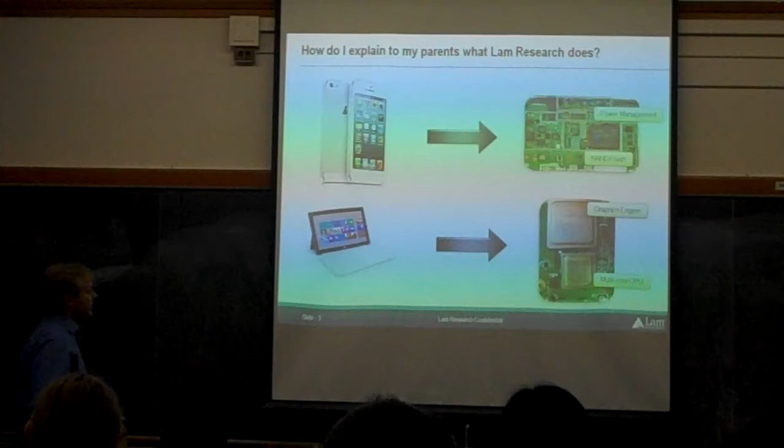So, how do I explain to my parents what Lam Research does? Besides, we don't do testing on animals. So you take any piece of electronics, it doesn't matter what it is - it could be a laptop, tablet, iPhone 5, this Surface coming out this week - and you open it up, which you shouldn't do unless you want to really screw things up, and you'll see a printed circuit board. Pretty obvious, everybody's seen these. And on the printed circuit board are a bunch of integrated circuits, a bunch of computer chips.

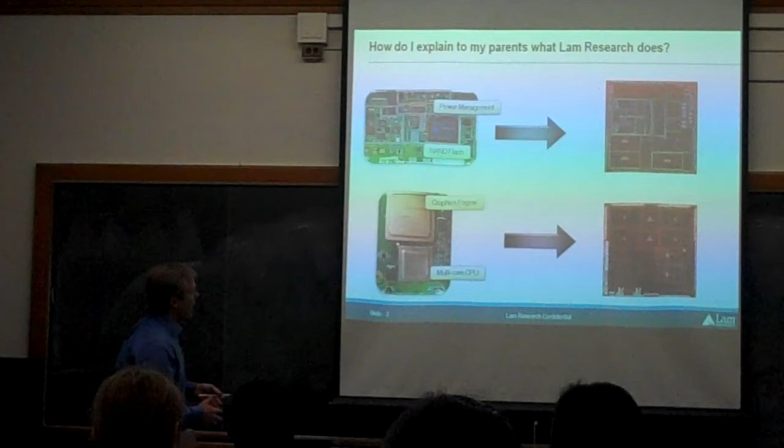Take one of those computer chips, and I open it up, and what do I see? I see a pretty complicated integrated circuit. It's got graphics processor units. This is an ARM processor, probably the A5 from Apple. There'll be NAND flash, there'll be memory. Any chip will look like that. Get a scanning electron microscope, go down a little further, and what you'll see at the heart is some very small structures - transistors, interconnect wiring. So that's really what's making these devices tick.

But how do you make these? Well, that's what Lam Research does. We make the equipment that processes the wafers, that makes the chips that go into every single piece of electronic equipment. And in fact, I can safely say that if you buy any piece of electronics today, maybe a car, anything that has a chip in it, that chip will have gone through a piece of Lam equipment. There is no chip made today on any sort of leading edge application - every USB stick - because we are in every chip maker in the world. And so I like to think of it kind of as the engine that helps keep the nanotechnology moving.

So we make equipment that's used for some of the processes - every chip, but not every single process. And we'll talk about the steps that it takes to make a computer chip.

Before we do that, let me tell you a little bit about the culture at Lam. We have a mission statement, a vision statement, and core values. A lot of companies have these, and they're just hung up in the cafeteria or something, but we spend a lot of time thinking about this, and we try to write the words and actually make sure we stick to them.

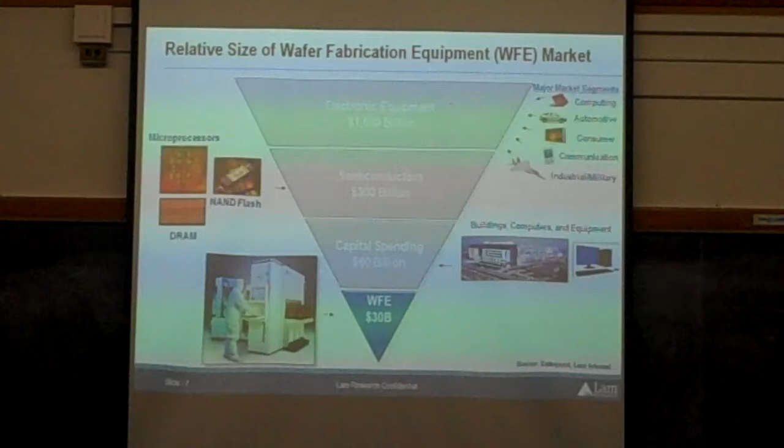So again, we take it for granted nowadays. You got a solid state video camera at the back of the room, everybody's probably got a flash drive on their keychain, your car takes a ton of chips now, semiconductor content, let alone military communication. It's everywhere. It's more than just iPhones.

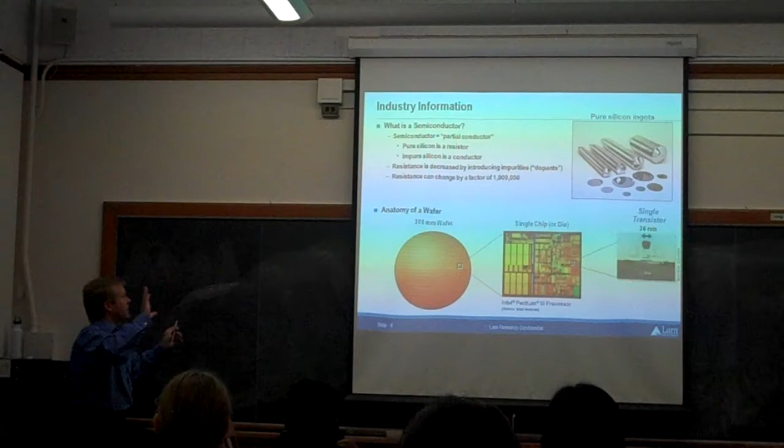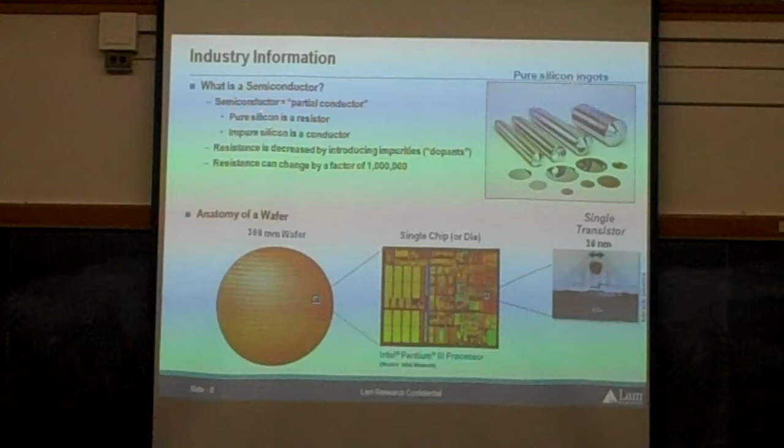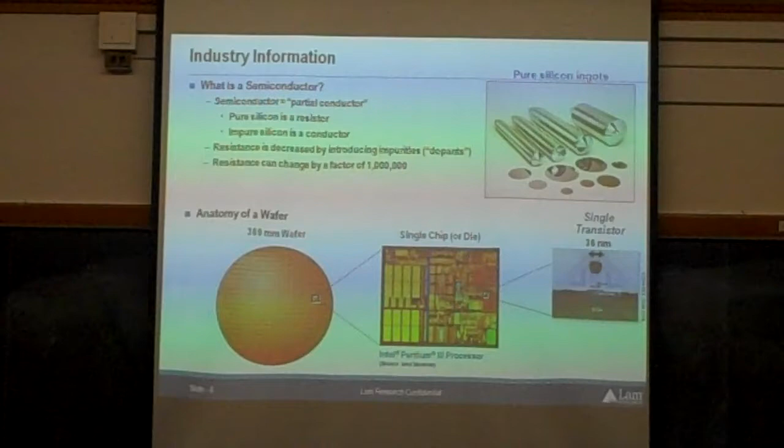So it's a semiconductor, and because maybe most of you haven't taken a wafer processing class, let's get a baseline. A semiconductor is kind of a partial conductor - it conducts some of the time, once in a while. You can dope it in a way to make it a conductor, or there's a form where it's a resistor. So if you think about it, if I have a conductor and an insulator, essentially it's a wire, right?

I got copper in the middle, and I put some plastic insulation around it, I got a wire. And with that wire, I can do all kinds of stuff - I can turn switches on and off, I can move signals around, I can store bits of information. And that's really all that happens, but on a very, very small level.

So if you look at what is processed in these pieces of equipment I'm going to talk about, they're wafers - pure silicon, single crystal silicon wafers that are pulled out at the correct diameter. Right now everything's 300 millimeters in diameter, so 12 inches across essentially. When they make the wafers, they have molten silicon, and they basically pull them out in these long tubes of solid single crystal silicon.

It's a very slow process - you put a starter crystal in, and then all the silicon, as it gets pulled out and cools, will arrange itself in a lowest energy state, and that turns out to be single crystal. Then they take these things and slice them into little discs, polish them, and that's your starting material to build up an integrated circuit.

So you take that blank wafer and start running it through these pieces of equipment. You deposit layers, you put masks down to remove selectively different portions of the layer. I got some conductors, some dielectrics, some resistors or insulators, and eventually I end up with a pattern with multiple layers on it. I'll show you some cross sections of those.

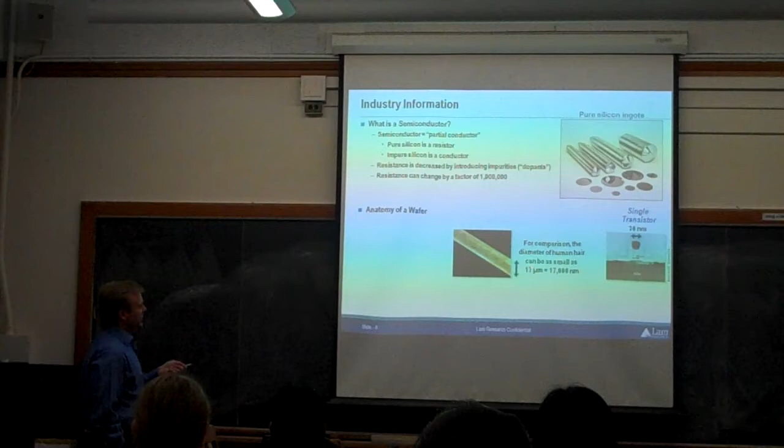Okay, so you have to think about how big a human hair is and all these things. We're working at 36 nanometers - it's continually just shrinking. I'll show you Moore's Law, if you've heard of that - these things get smaller and smaller every generation. A human hair is 17 microns, so that's 17,000 nanometers. You can see we're a lot smaller. At some point we need something else to compare it to.

But so, customers - we talked a little bit about it. It's worldwide. Pretty much anywhere they're doing high tech there's a wafer fab, and if there's a wafer fab, there's Lam equipment there. The big three are Samsung, Intel, and TSMC. That's kind of by sales, by the amount of equipment they buy, but the real measure in my mind, since I'm worried about research and development, is these are the customers driving the technology roadmap. They're constantly saying, look, I need to shrink, I need to do this faster, I need to do it smaller.

IBM clearly has a great R&D group and they help, but they're just not as big a player anymore. So you can see it is truly a global business. Please stop me if you get questions, it's fine.

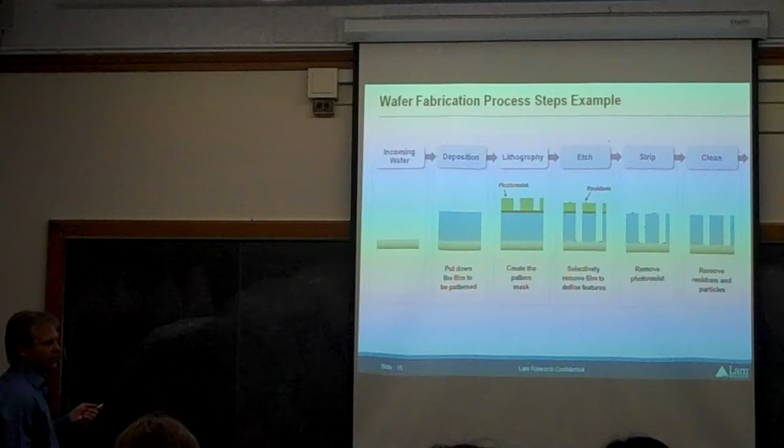So if I take these steps and look at it in a very simple cartoon, I've got a wafer coming in - this is that circular piece of silicon. And I have to put down some sort of layer to be patterned later. This could be silicon dioxide, this could be silicon nitride, it could be copper, it could be any number of films that you need to build up an integrated circuit.

But in order to pattern it, I want to end up with something that looks like this, where I've got maybe some lines, those transistor-like structures. So again, I'm looking at the cross-section here. How do I do that?

Well, I have to use actually a photographic process, although it's on a very, very small wavelength scale, where you spin on this green layer - it's just a polymer essentially, but it's an optically sensitive polymer. And then I have a mask of what I want the pattern to look like on the wafer. I shine a light through of the right wavelength - in this case it's a UV exposure, a UV light source. It's blocked where the mask is opaque, and it transmits through.

And where it transmits through, it'll cross-link. So I end up with a region where, when this polymer layer is on there, this part is hard, this is soft, hard, soft.

And basically then I can chemically remove, I can wash away the soft parts, and I end up with this layer that's the pattern I want, but it's in polymer. That's a material that's not going to last on a silicon wafer. So we use that in an etch process to transfer that pattern down into the underlayer, whether it's silicon dioxide, silicon nitride, or a metal. And then that's the etch part.

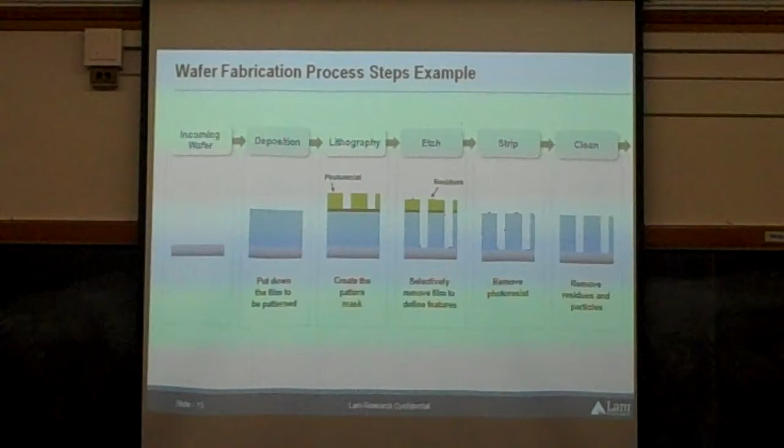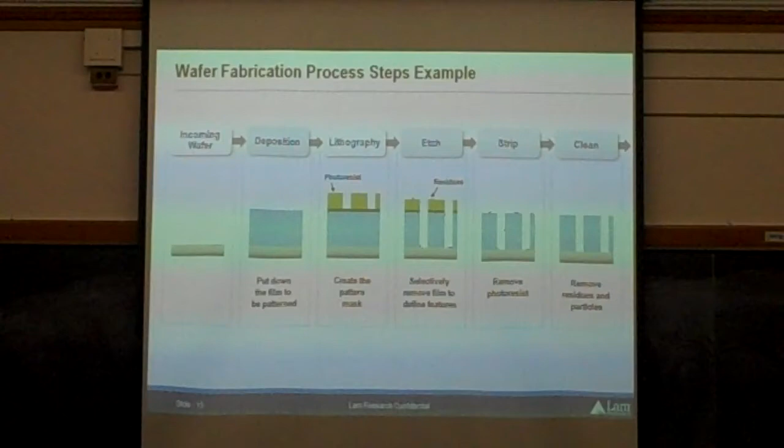And then I need to remove that mask, and that's the strip, where we do photoresist removal. I'm removing this photosensitive material—it's called a resist, photoresist, because it's photosensitive, and it's nominally supposed to resist the etching process. It's got to stick around long enough so we can finish clearing out the places where we don't want the material. And then, as nicely indicated by our little red dots, there's going to be some residues, because remember, this material's getting removed, and some of it may stick around, so you need to do it clean. You can imagine on these small scales, if I have any sort of impurity on there, it can easily trash the transistor. Okay, so here are the Lam processes.

So I'll walk through each one of them, and we'll kind of look at it in a cartoon way, what are different ways to do it.

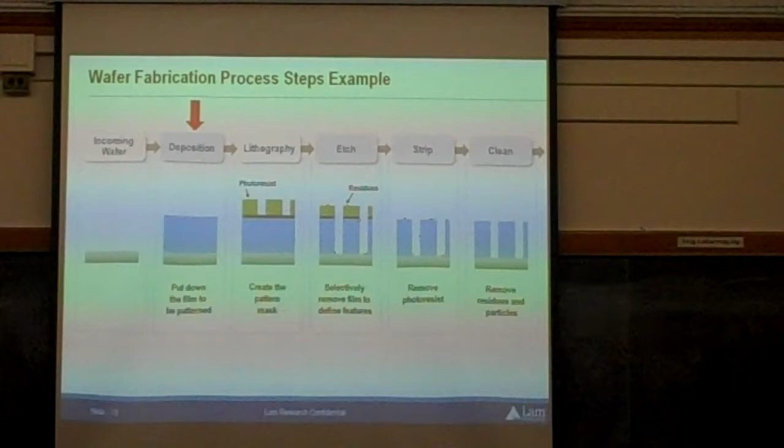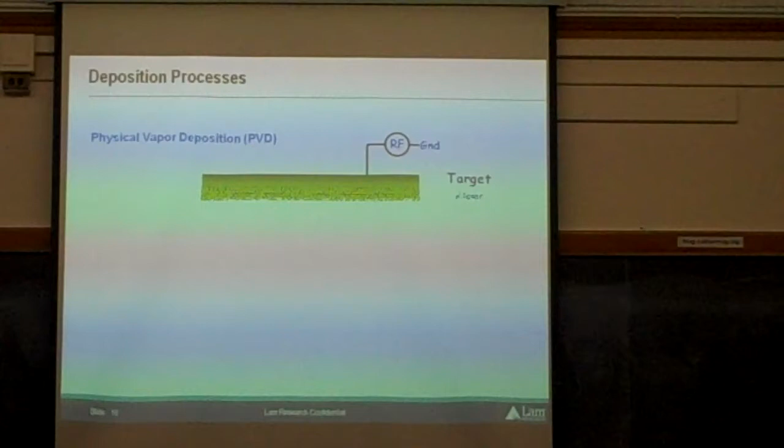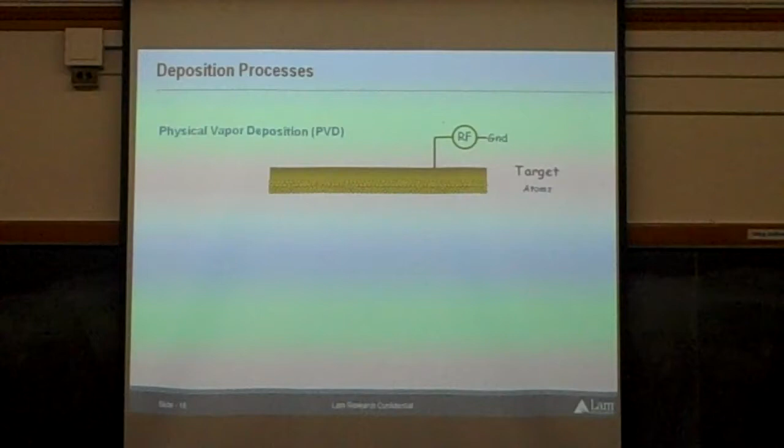So I'm going to show you three different types of deposition, and there's kind of a hybrid in the middle of one of these. One is physical vapor deposition. So I bring in, I've got a vacuum chamber, and I bring in what we call a target, and it's just a piece of the metal that I want to transfer to the wafer. It could be made of copper, could be made of tantalum, could be an alloy like tantalum and carbon. And then I put the wafer down here.

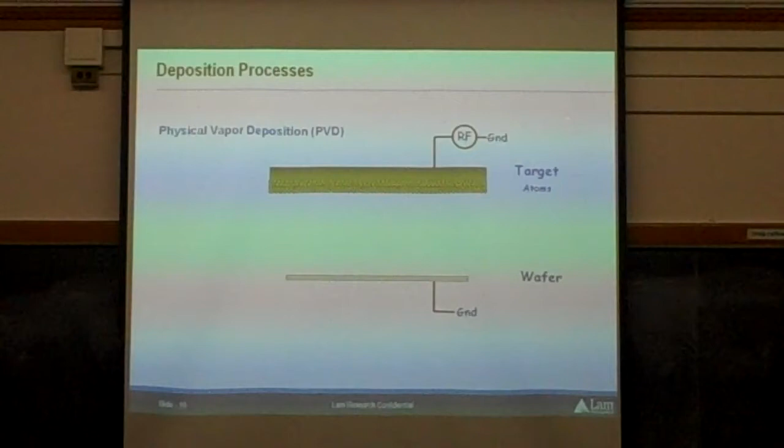So remember, I'm in a vacuum chamber, and I put a plasma—you see plasma is here all over the place, so we'll actually hire a lot of plasma physicists as well. If I flow argon in here and turn on radio frequency power, I basically can get this induced field coming from this metallic plate to rip off electrons off of neutral argon. So I've got just argon gas floating around there, and electrons are easy to come off if you have enough power. So now I've got an ionized gas—I've got electron soup and Ar plus ions sitting in there.

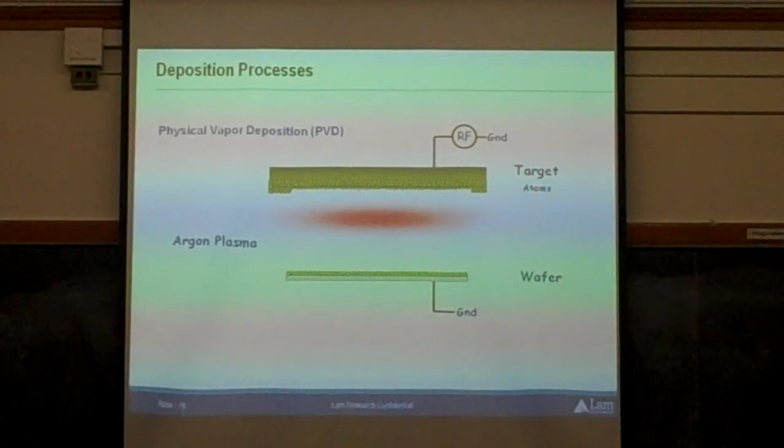And I can now use that to accelerate those argon ions, which are relatively heavy. They're in the gas, and I can accelerate them so they bombard this target. They sputter off an atom, and it's going to go line of sight because it's low pressure down to the wafer. So I'm basically transferring a layer of metal from this target onto the wafer, and it should look like this. Okay, so that's our physical vapor deposition—it's just a physical process, right? I'm just sputtering, bombarding this target with little projectiles of ionized argon. And okay, here's copper, titanium, tantalum.

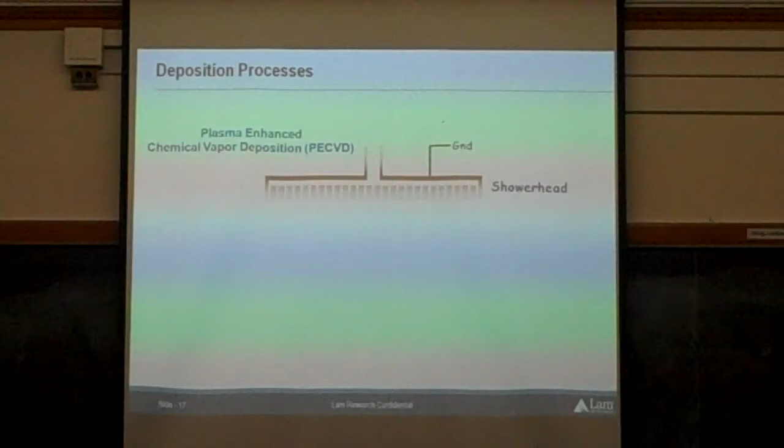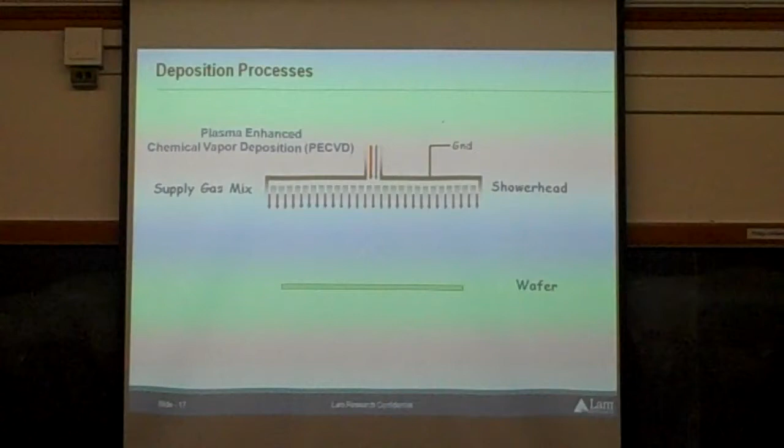So now there's a variation on that where instead of physically doing something, I'm going to take that same vacuum chamber, and this time I'll put in a shower head. Again, it's made out of metal, but this is not going to be participating, hopefully, in the reaction that's going on. Put the wafer down below, and I need to flow reactive gas. So this is chemical vapor deposition. I want to put the gas uniformly across the top of the wafer. So now I've got these two red and blue gases coming into the wafer, and I need to give it some sort of energy.

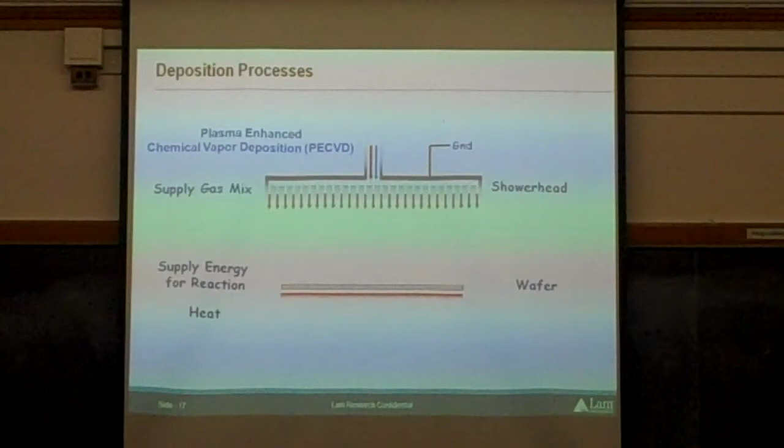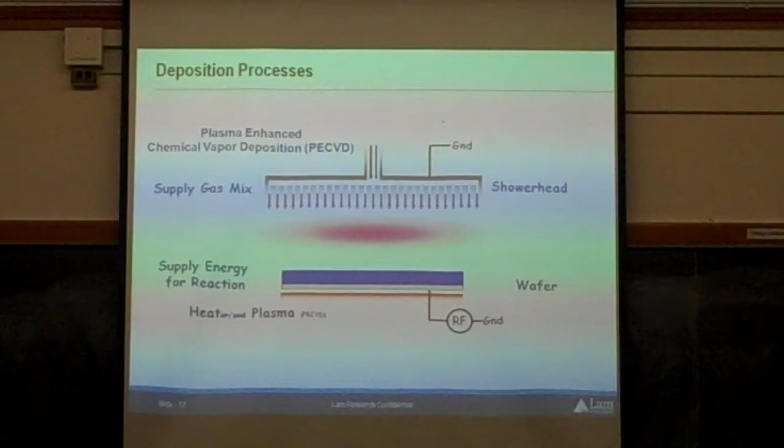If I do just chemical vapor deposition, these gases will condense on the wafer. I give it heat and it reacts—you kind of got blue plus red equals, what do we have? Purple, right here. And there's two different ways to do it. One is I can have the gases condense, turn on some heat, and have it react—pretty straightforward, just a chemical reaction. An example of that is if I take silane and ammonia, I can make silicon nitride, which is a good insulator with unique properties that you want in the semiconductor device. I can also put some RF power on, same thing that we did in PVD.

Remember, the RF power was up here. RF just means radio frequency, so it's oscillating up and down. This causes an oscillating wave, which will rip electrons off of the supply gas. Those gases can then react in the gas phase and deposit on the wafer. That's plasma, the PE part, plasma enhanced.

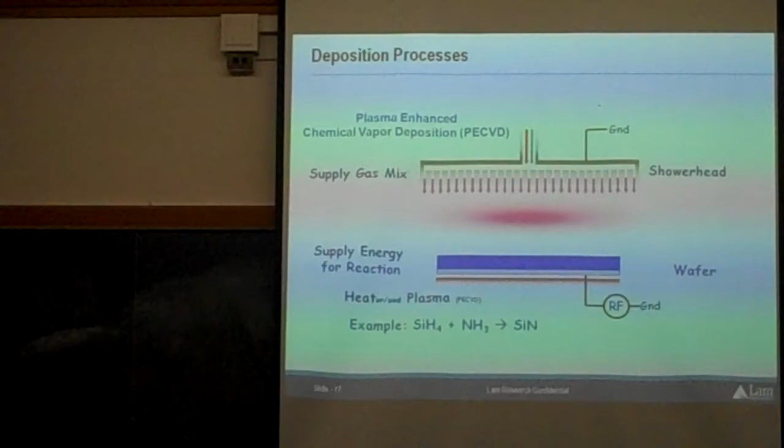So I can have just a chemical reaction that's thermally driven, or I can add in a plasma component and make it much more reactive. If a blue and a red ion come down, they're going to very quickly react, wanting to recombine if they've been ionized. So that's a good way to put down insulators.

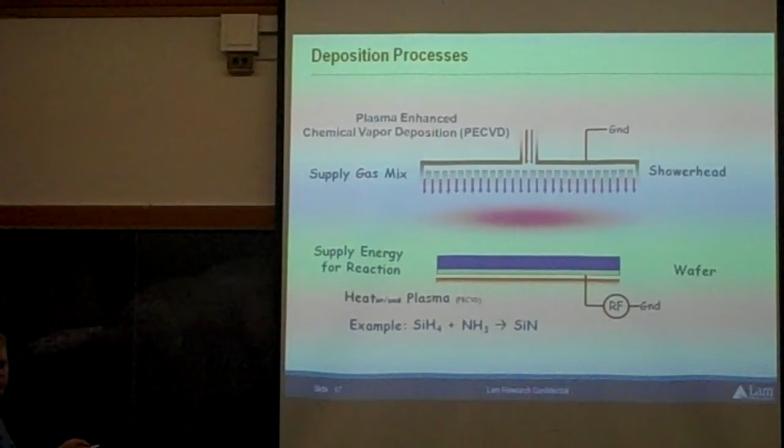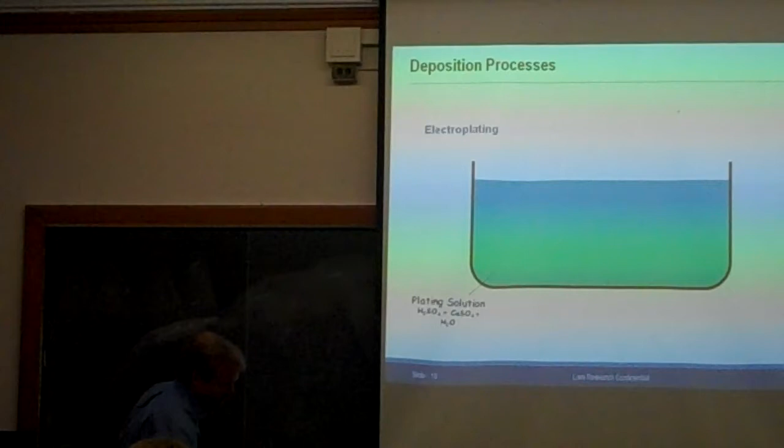Okay, electroplating, classic chemistry problem. The Nernst equation is somewhere in here. So I take a bath of sulfuric acid and copper sulfate, and put in my source of copper.

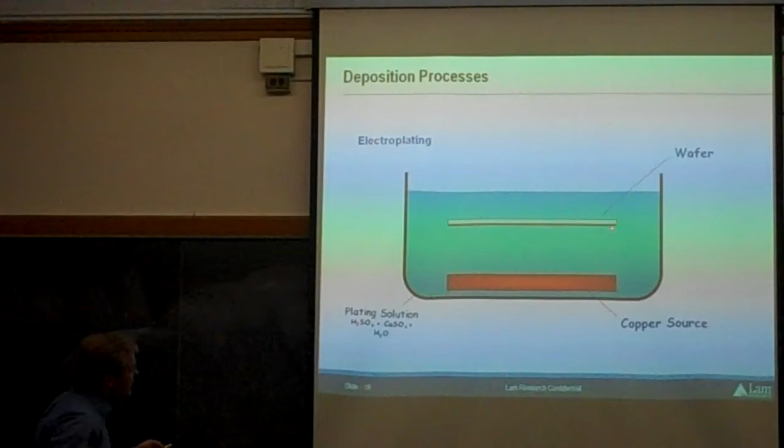So it's analogous to the PVD process, except now it's immersed in this bath. I put the wafer on upside down in this diagram, so it's all in the bath. You'll notice there's actually a copper seed layer on here. This reaction won't work unless this is a conductive surface.

So we use that PVD process I showed you before to put down that first layer of copper, then put it in this electroplating bath, hook up your Duracell battery, and you get a standard electrochemical reaction right here.

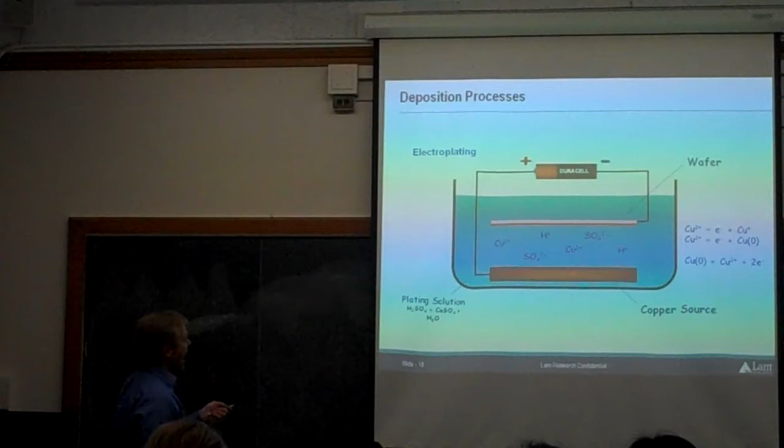What happens is the copper will then migrate from the anode to the cathode, and I plate the copper. But it can be in very small features, so I can have spaces on those transistors and coat it with copper if I wanted to. It's a very precise way to grow a lot more copper than just a single layer.

I want to jump back here. I want to give you one other variation on this because you may run into it. I talked about chemical vapor deposition: I'm flowing red and blue, no plasma, they're both sitting on the surface, I heat it, it reacts. There's a method - Finland was the first place they did this, about 20 years ago - called atomic layer deposition.

That takes advantage of special precursors. You have a special red, and you flow that only by itself for one step. It's chosen so that it'll make an atomic layer, it's self-limiting. It will only coat on the wafer, it won't coat on itself, so you only get one atomic layer across the surface. Then I flow blue, and that'll only form one atomic layer on the surface of red.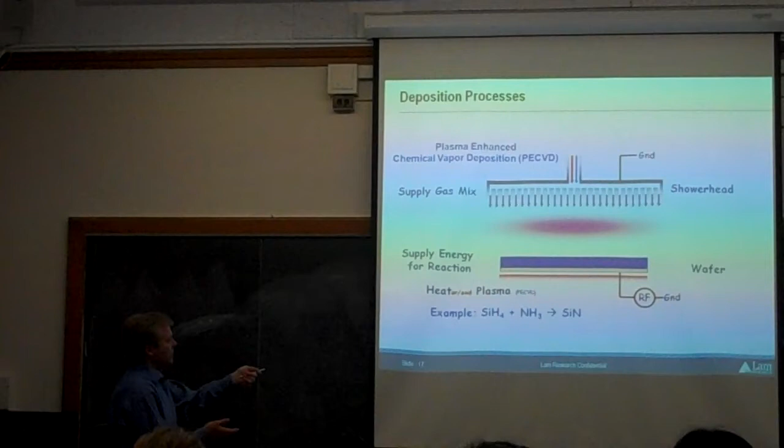Then I do a reaction step, heat or whatever to trigger it, and it forms, in this case, purple - one layer. So you're literally doing one atomic layer at a time, which you can imagine is very precise. I want to grow an atomic layer - what's a bond length? The carbon-carbon bond length is about 1.5 angstroms. So I can make stuff on the order of tenths of nanometers and build it up.

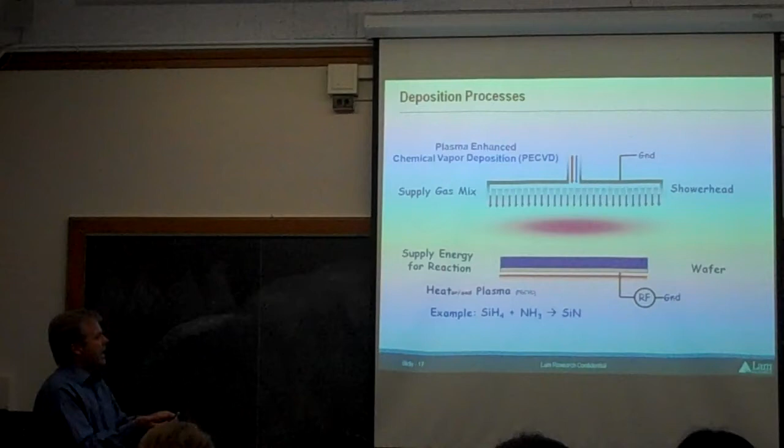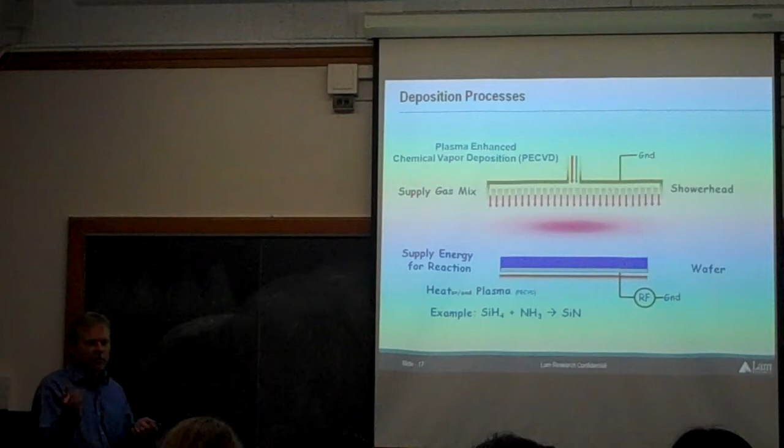Great for precision, terrible for throughput and efficiency - it's going to take a long time. So the transistor in every one of the Intel chips today has an oxide layer that's the gate, the thing that helps turn the transistor on and off. It has to be super thin.

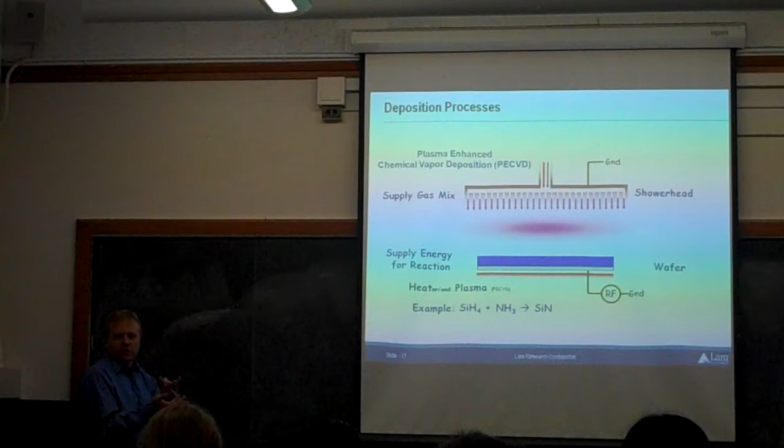And so it used to be silicon dioxide, but the silicon dioxide can't take it anymore - I have to keep making it thinner, and now it's so thin that it's leaky. So they moved to a rare earth metal, hafnium, making a hafnium oxide. The only way to put it down is with this atomic layer process. The good thing is they only need a few layers of it to make a good transistor. So that's another kind of chemical process used in this industry.

So you take all that science and engineering and you've got to put it into a system that can not only make it work on a single chip, it's got to work on a big wafer, on thousands of these wafers every day. There's a whole pile of engineering beyond just the basic science to turn these things into production systems.

And that's why it costs $5 million a pop buying one of these systems. So you can see here, this is the plasma enhanced. I didn't talk about the super plasma enhanced, a high density plasma. You really crank it up, and that allows you to fill certain features that standard PECVD doesn't work for.

Here's that tungsten atomic layer deposition or chemical vapor deposition. This was that electrochemical deposition we showed with the copper, and here's the PVD, physical vapor deposition. Interestingly, some of these materials need to be cured even after you put them down, so we have a product that's basically just ultraviolet lamps. You put them in different stations, the lamps come down right over the wafer, and you shoot the lamp on, and it does the curing of that film to make it tougher.

All right, let's move on to etch. So plasma etch, same thing. I've got a vacuum chamber, and I put in this electrode. It looks similar to the PECVD, and there are a lot of similarities, except in this case I'm going to put a power generator up here. Remember, every time you see that in a vacuum chamber, that means I can make a plasma. And I do the same thing now on the wafer.

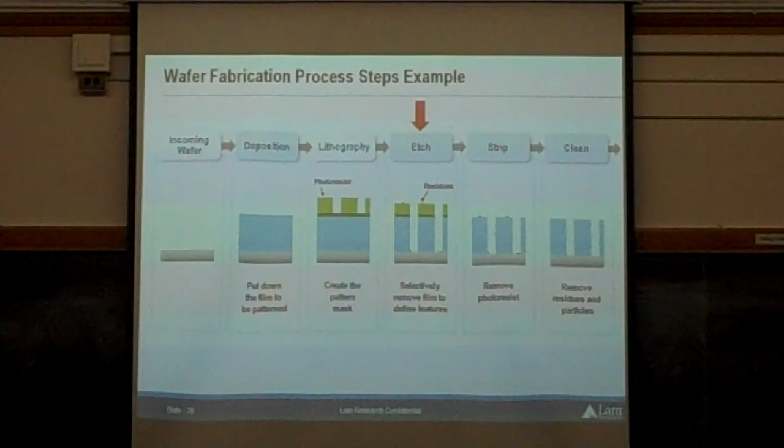Let's go back real quick. I deposited in the last step all those products I was telling you before. Then there's this step in between that Lam doesn't do, where we have optical lithography, where I'm transferring the pattern onto a photosensitive polymer. That's done, and I take that incoming wafer, and that's what's going to go into my etcher. So here's the wafer, here's that film we just deposited, and here's the layer. At the end of the day, we want just this pattern in the blue with no green on top.

Okay, and you notice I've got another radio frequency generator, another power supply down here. So same thing, I'm putting in gases, but now I don't want them to react to deposit, I want them to etch away with this blue material. The trick is, how do I tell the gases? I'm going to make them a plasma. I'm going to turn on the RF power, and I'm going to rip electrons off of the atoms, and I'm going to have an ionized mix.

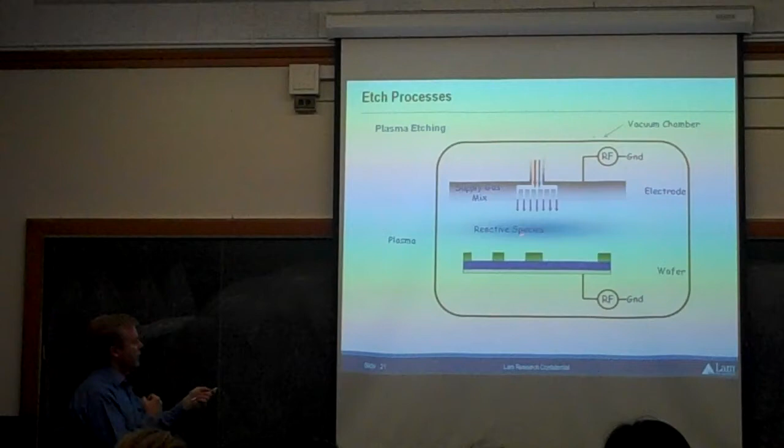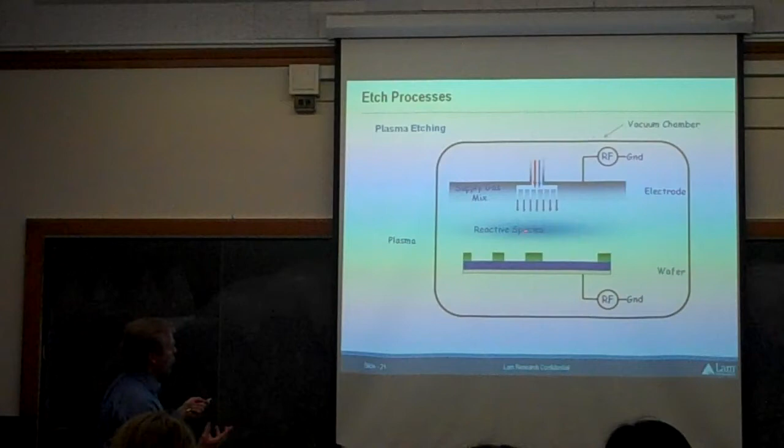So it could be chlorine and oxygen, for example. I'll have Cl plus and an electron floating around, and O plus and an electron floating around, and that's all in this soup up here. Then I use the power down here to accelerate those ions down to the surface. If you pick your gas - this is what chemists and chemical engineers do - you have to experiment and figure out what gases, what reactive species, will etch the blue.

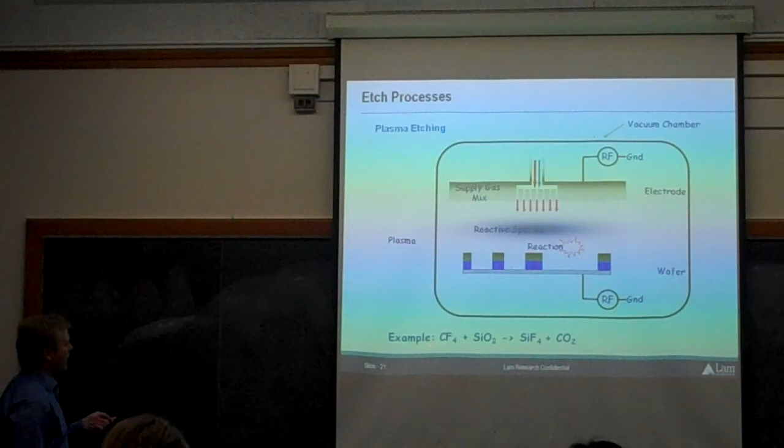That's actually pretty easy, but the problem is I can't etch the green, because if I etch the green, that goes away and I don't have my mask anymore, and everything's gone. So it's not as easy as it always seems, but in PowerPoint it's great. So the blue, or purple, goes away. In this case, if this purple layer was silicon dioxide, I could put in carbon tetrafluoride and form a volatile byproduct - both CO2 and SiF4 get pumped away. So we're in a vacuum chamber, those byproducts go away, and everything's great.

So if I look at the products we have in the etch series, those chambers, that little schematic that I showed would be sitting right here - that's what this box is enclosing. Underneath is where the pumps are, and the top is where the radio frequency generators are.

We basically have to design different types of plasma technology to etch different types of materials. This etches things that are conductive typically, so silicon, but not metallic conductive, so semiconductor conducting materials - primarily different forms of silicon. This will etch dielectrics, so the oxides and nitrides used as insulators, and this will etch, typically, aluminum. The copper, turns out, you can't etch - you have to do it with aluminum. To go into how you do the copper, you basically have to do a reverse process where I etch the hole and then fill it up with copper, as opposed to putting on the copper and then etching it.

If you've heard of MEMS, microelectrical mechanical systems, there's a lot of silicon etching involved, so we make a version of our etcher for that. And this is TSV, through silicon via. The challenge is that transistors are so small that connecting a logic part to a memory is actually pretty far, even though on a chip scale it doesn't look very far. So they've found that if you stack the chips, say put a DRAM chip on top of an Intel microprocessor, as long as you align them properly, you get a very high performance stack. You have to etch all the way through the silicon to make contact with the chip below. So that's what this etcher does, through silicon etch.

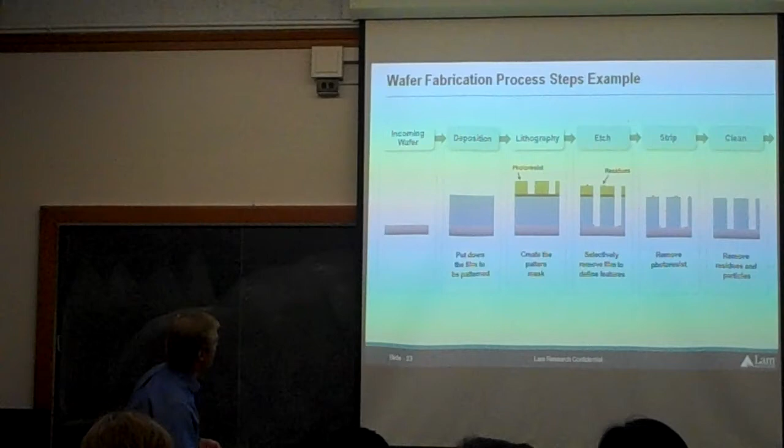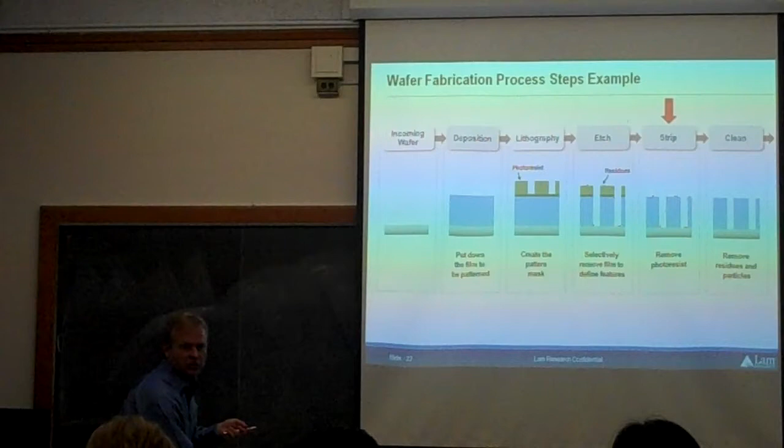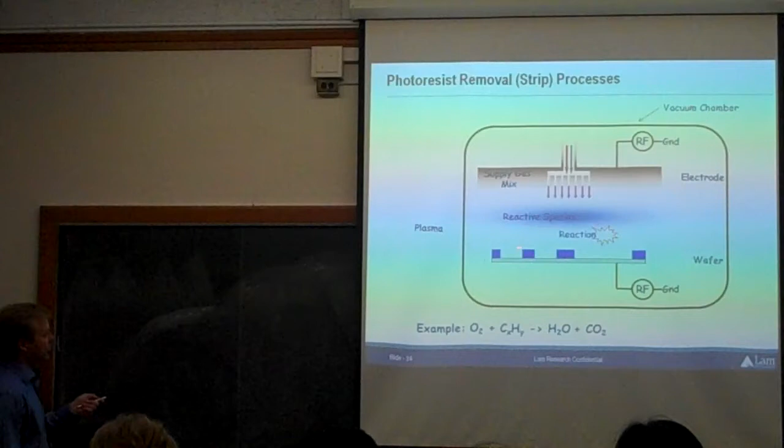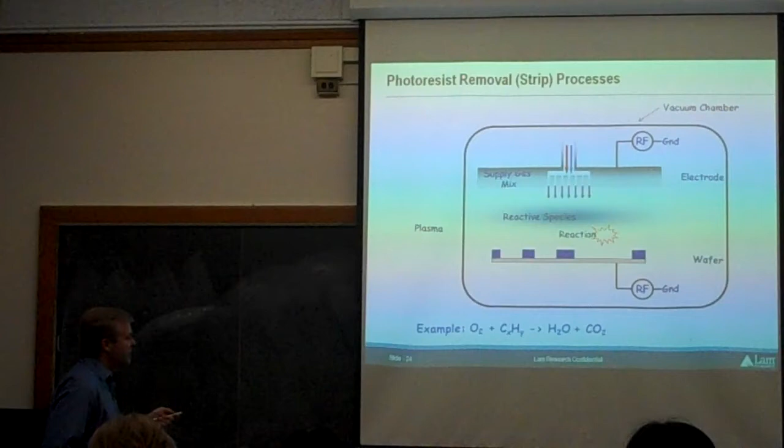Okay, we're now down to the photoresist removal step. Remember, we put down the layer, we've etched the pattern onto it, but I still have this green photoresist, which I don't want on the chip in the final package. That essentially looks like an etcher. You'll typically run oxygen. The photoresist is some sort of polymer, CxHy, could have some oxygen in it, and you're essentially just burning it off, forming water and CO2. That's a relatively simple thing: you turn on the plasma, get ionized oxygen, it reacts with the carbon and hydrogen, and the green goes away. Again, it's got to be selective, it better not start etching the underlayer material.

Writing this down seems really simple, but in reality that's why we have so many process engineers, chemists, and chemical engineers. That gets converted into yet another set of products, strictly to remove photoresist after etch. It turns out that when you're making a logic chip, like graphics chips or the central processing unit in a phone or laptop, there's a different set of requirements because the transistors are maybe a little more fragile, versus memory like NAND flash or DRAM, where you just want to crank through. It's actually a pretty easy thing to do, but it's got to be really fast. So this is a little more precise, and this is fast.

Then we've got a version where you say, well, why don't you just put the etch and strip steps together? So we actually put them on the same system. I should take a step back - I didn't explain that when we're processing these wafers, there's a box of them in the fab that comes to your tool. It's all automated, robotic. It delivers a box of 25 wafers to, say, a stripper etcher, and it gets put on the front of the system in a special shelf. Then we have robots that take each wafer and put it into multiple chambers, so we can have multiple etch chambers. In this case, we've got an etcher and then a stripper, with a robot that moves the wafer once it's done etching so we can remove the photoresist on the same platform. That's another reason why these things cost so much money, because we have to have robotics. And remember, any contamination will kill the device, so these things have to be super clean as well.

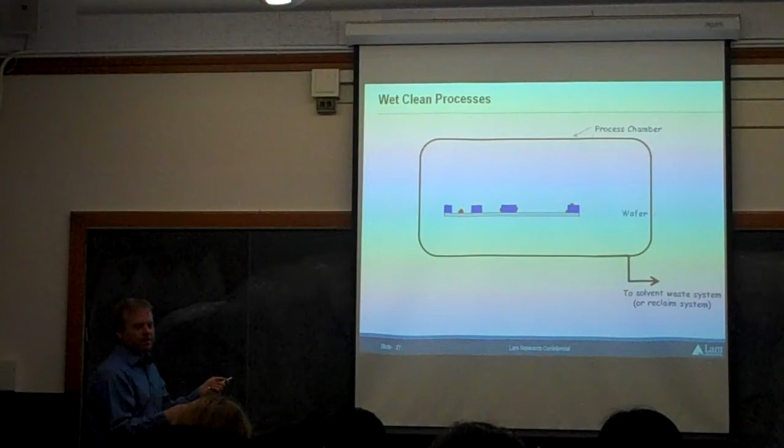Okay, let's move on to clean. In the cartoon, everything's not as clean as the PowerPoint showed. So once you're done with the etch, I can have residues. Remember, I've got silicon combining with oxygen or something, but it may not be volatile enough, and it sticks on the sidewall. So now I've got something that's not the blue—it's halfway reacted, but it didn't get pumped away.

Or in that deposition process, I had a reaction occurring in the gas phase, and it kind of rains down, but it's not the right species that I want, so I get a particle. Or there's dirty grease or something from the robot if you don't have it working right. So basically at every step along the way, there's a chance these things won't work. The transistors will get shorted out if you have junk on them. So cleaning is an important part—it's kind of a necessary evil.

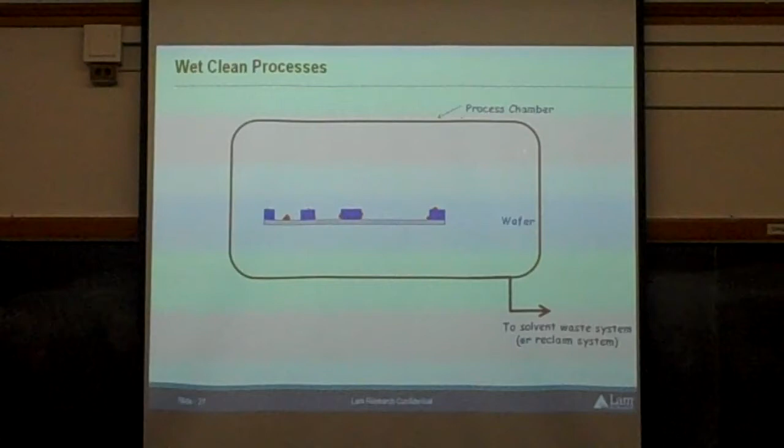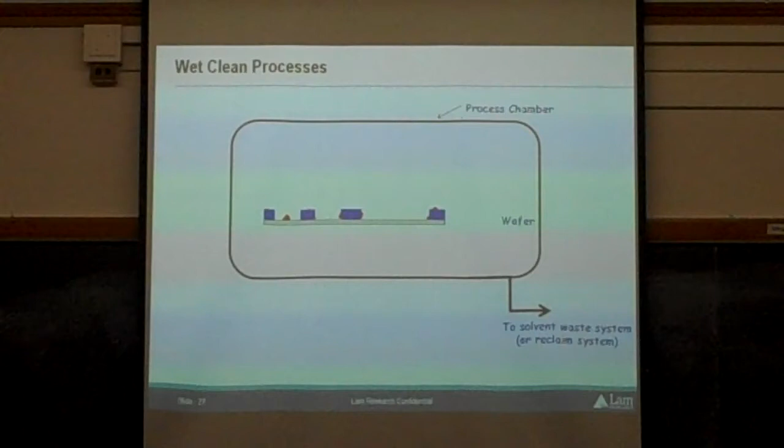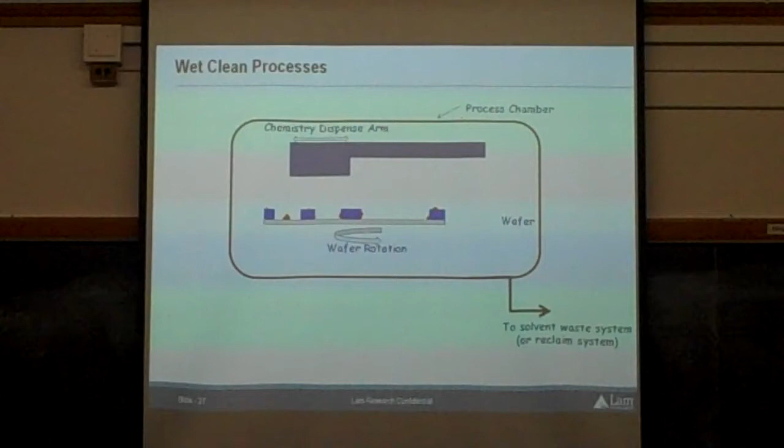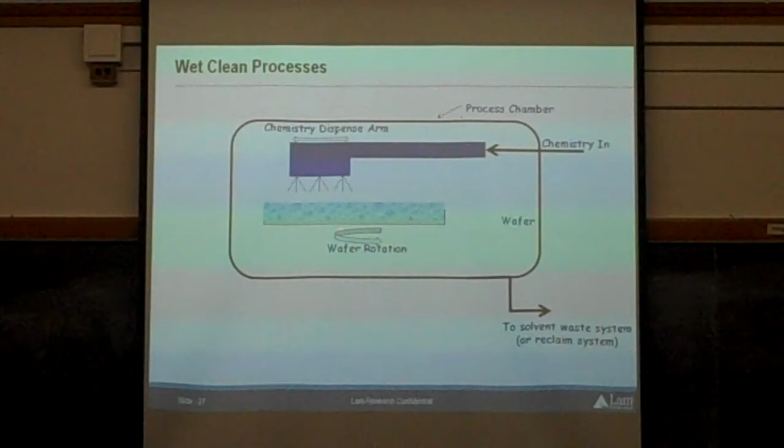And in this case, we're talking a lot about vacuum processing, but this is atmospheric. I'm basically taking an expensive Teflon tub, putting the wafer in. I've got a drain system, and I bring in a chemistry arm to dispense chemistry—a straight acid or a special solvent—and I start rotating the wafer. Then I start flowing the chemistry, and it's got a bunch of nozzles on it. It comes on, the magic chemistry, wafer spinning, the arm moving around, and suddenly it's PowerPoint clean.

It's pretty straightforward on the acidic side of things—sulfuric acid, hydrochloric acid, hydrofluoric acid. Then there are much more subtle organic solvents. There are whole companies in the industry, Lam doesn't do this, where they hire a whole bunch of chemists and start making custom chemistries, because you can imagine trying to remove certain things while not touching the transistor. So you've got very complicated buffer solutions. It's a big business, and you can dump it, but from a green perspective it's expensive.

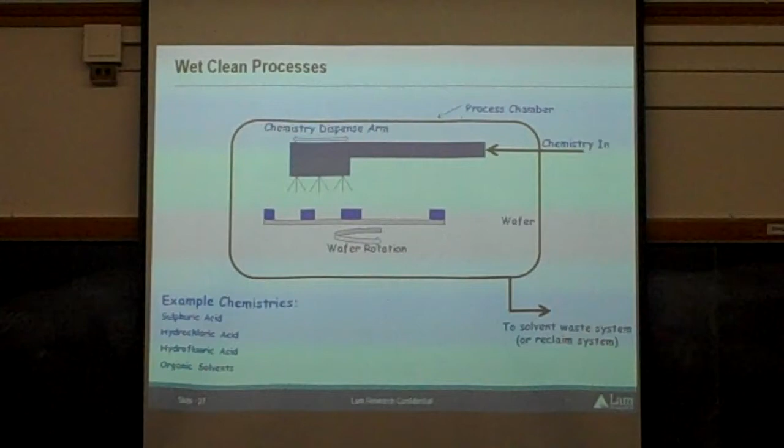I'd much rather reclaim it. So there's a whole industry on how to take these waste streams and recycle them into something I can use back on a good wafer.

So Lam has spin wet clean, single wafer processing, one wafer at a time, and we're always spinning the wafer to get uniform dispensing of the chemistry. We've got two different versions here, a high volume and a lower volume. Packaging is when the chip is finally made, you put it into the package that goes into the circuit board, and they need some cleans there.

And then there's an interesting application of plasma technology. This is again taking a garden hose and spraying chemistry on the wafer. In this case, the edge of the wafer is called the bevel. We actually make a system—you can see the wafer sitting in here—that when you close this lid, there's a plasma only on the extreme edge where there's no circuits.

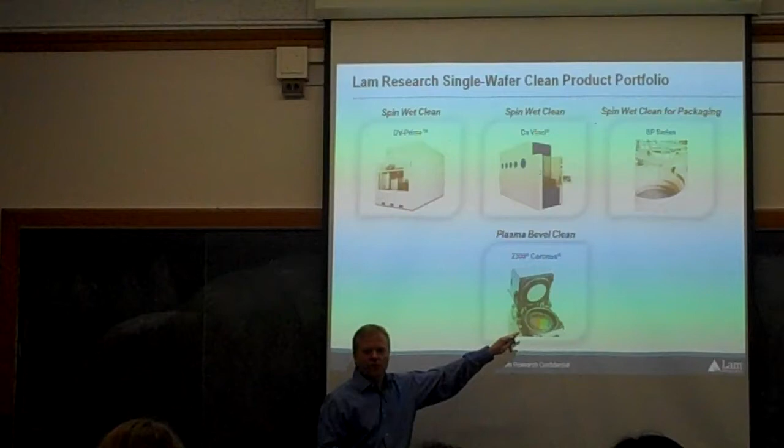It turns out that as you're processing the wafer through all these steps, junk will start to accumulate on the edge of the wafer, because you're cleaning all the time very much in the middle. You're very conscious about where the chips are.

The edge doesn't really matter, except in subsequent processing, with thermal expansion or something, stuff will flake off and pop in the middle of the wafer. So we created a whole system that etches away the junk at the edge of the wafer so it doesn't later pop onto the middle.

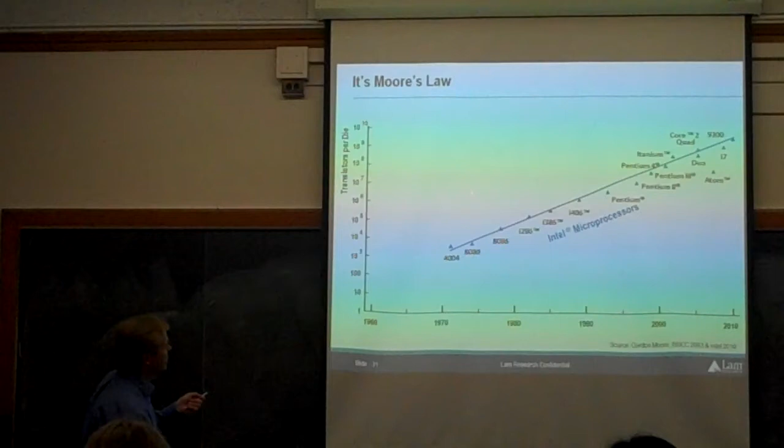Let's talk about where things are going. You may or may not recognize this graph, but it's essentially Moore's law. This shows how many transistors, here we're at 1 billion, are packed into a single chip. Gordon Moore essentially noticed this.

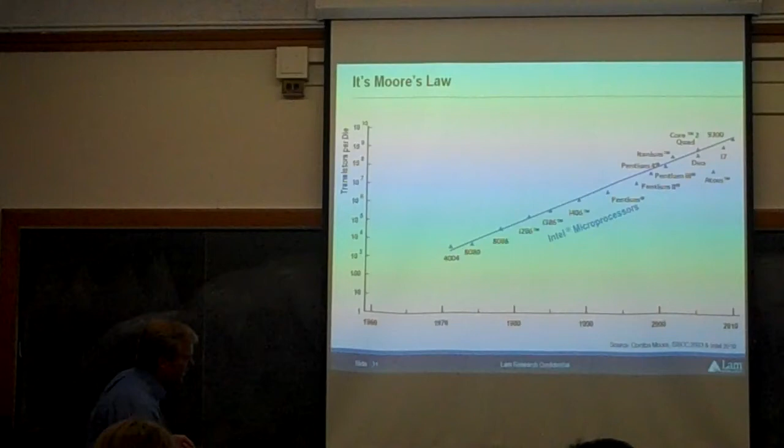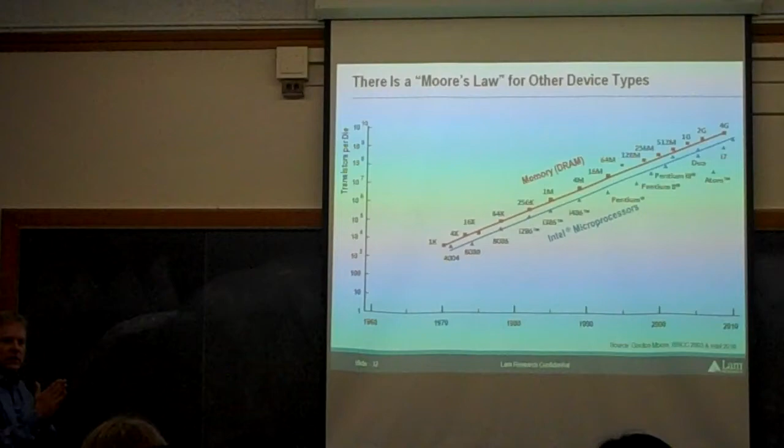I'll talk to you about the history of this. But there are different types of Moore's law. In memory, it's actually accelerating even faster, because memory is just a bunch of the same thing over and over, whereas on the microprocessor you have different types of gates, so they can be more aggressive in how they scale.

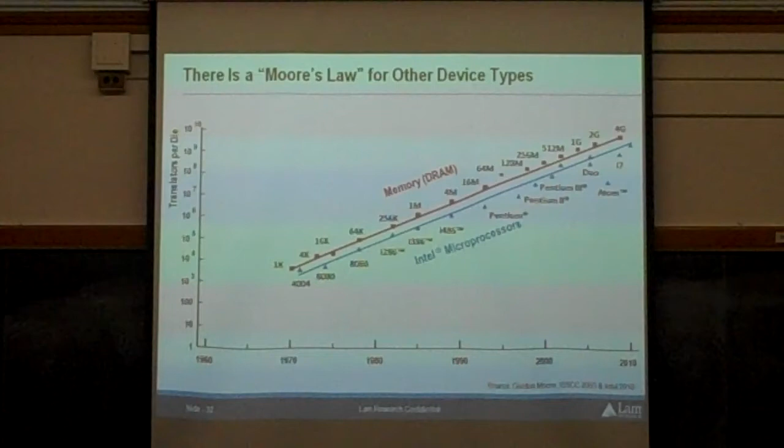And so the original Moore's law looked like this. In 1965, in 1960 there was one transistor, and they got it up to 10 a few years later. He noticed it was scaling, doubling about every year or so. Then it settled down to about 18 months to 2 years. Because this is a log scale, the number of transistors on a given area will double about every 2 years or so. And it's pretty much held to that.

Now, how the transistors are used has changed dramatically. It used to be that microprocessors would come out at 1 gigahertz, then 2 gigahertz, then 4 gigahertz, and everybody wondered when we'd get to 10 gigahertz. Well, nobody's at that today. Everybody's around 1 to 2, depending on where you're at, maybe 3.

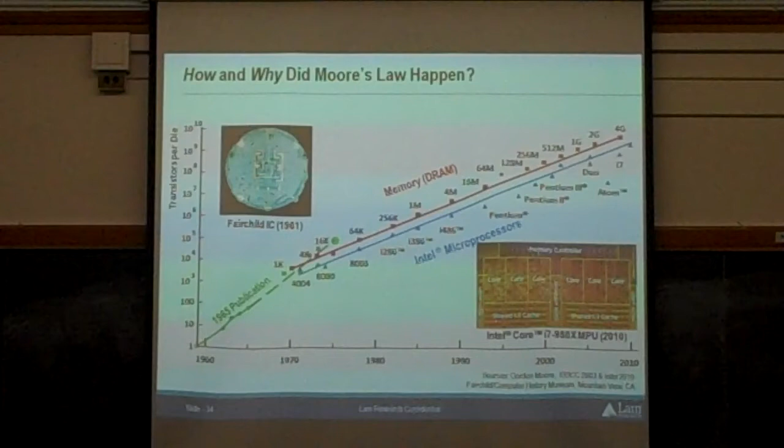What happened was they said it's going to be much more power efficient if we break all these transistors into separate cores, so they're kind of mini CPUs. So in a classic sense, the number of transistors in a given CPU stopped scaling, but the number on the actual chip kept going, and it continues to go.

So why and how does it happen? The why is really interesting, and in the original Gordon Moore publication from 1965, he got it right away: it's all economics, not a technology thing at all. The only reason you're shrinking is because you get lower cost.

If you think about it, I'm processing one wafer. If I can get twice as many chips on it, or twice as many transistors in the same chip, that'll be faster and I can sell it for more money. Or like in memory, I went from having 400 chips on the thing to having 800 chips at the same density. So the why of Moore's law is really an economic thing. Everybody kind of thinks technology, but there's a huge technology component too, and that is how it happens.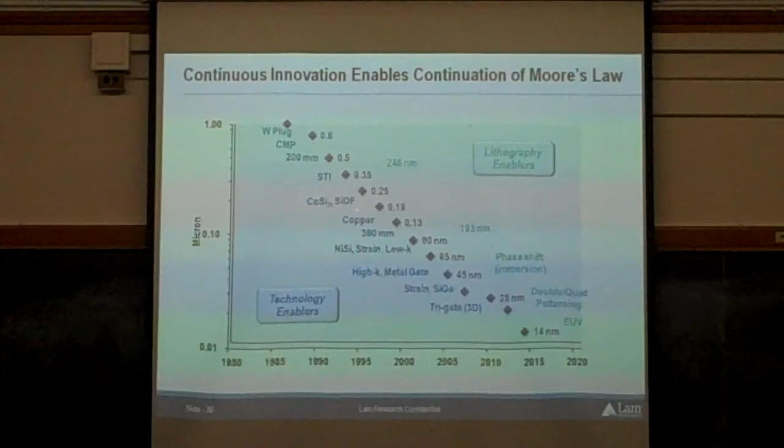And the resistance of the aluminum got too high. When we shrink down to this size, the aluminum was just too resistant, the chip wouldn't work, so you had to switch to copper. All along here, there's a tremendous amount of innovation continually happening, and not only in one place.

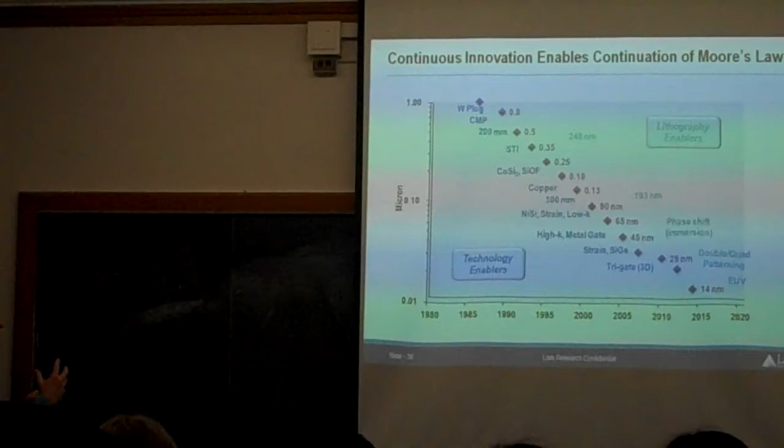So this lithography we were talking about, we're using light to image the mask onto the wafer. The wavelength you use determines the minimum feature size, and you can see they have to go to smaller and smaller wavelengths. In fact, now they're working on extreme UV, which has a wavelength of 13 nanometers. That allows a classic shrink, making every transistor smaller.

But along the way, there are so many other things happening. A lot of them are materials related, so that's where chemists and chemical engineers come in. And a lot of them are device related. With strain, they found that if they put a layer on the transistor, it puts some stress on the silicon and opens the atomic lattice just enough so electrons can move through faster. It's such a subtle thing, but it's used in every chip now, with different materials as well - nickel silicide, silicon germanium.

Intel just came out with their new tri-gate. They're ahead of everybody - instead of a transistor that's kind of flat like I showed you, they're turning it on its side so they can get a much longer transistor length in a smaller size. Similar to the hard disk industry, where they used to have a magnetic particle sitting flat on the disk, and then they flipped it up on its side so they could pack them in more tightly.

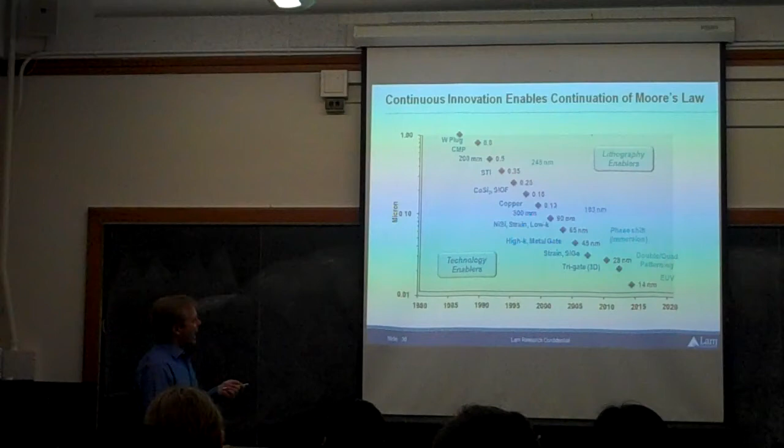Same thing's happening here. And this 200 millimeter, 300 millimeter - we talked about wafer size. In the late 80s, early 90s, people went from 6-inch wafers to 8-inch, 200 millimeter wafers, because you get about double the area. Same thing happened in the late 90s, going from 8-inch wafers to 12-inch, 300 millimeter wafers - again, a productivity gain, nothing to do with technology necessarily, but I get twice as many chips at the same size. Now they're going to move to 450 millimeters, 18-inch wafers. It's kind of an oxymoron - I'm taking something so small, nanometers across, and doing it across this giant wafer with trillions of them on a single wafer. But that's what the economics is forcing us to do.

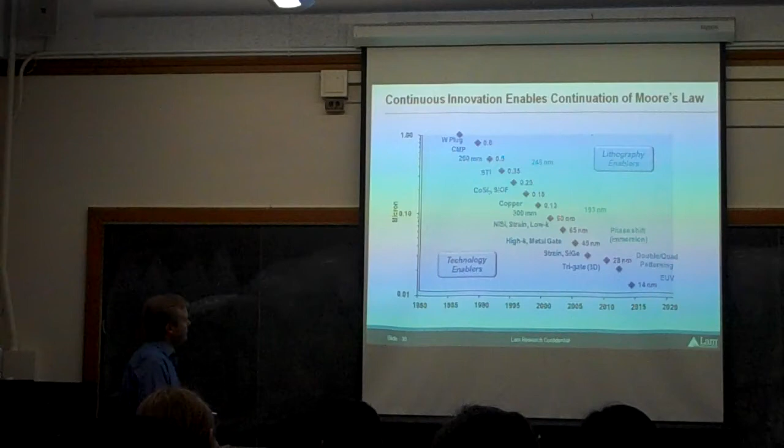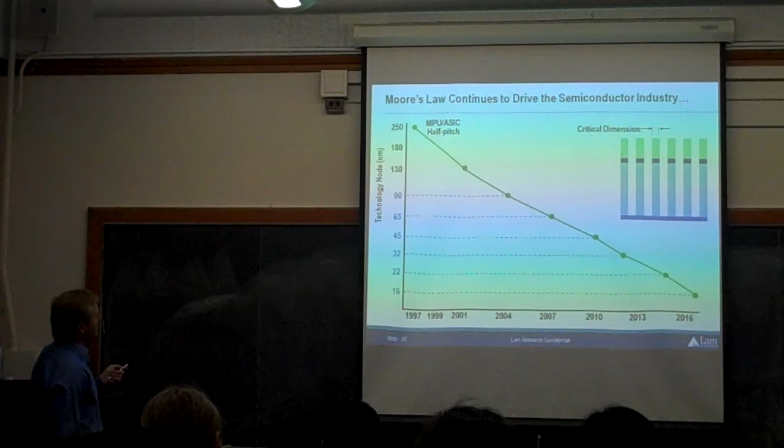If I'm memory, I said I'm a little more aggressive - I can actually shrink faster because it's a little simpler to do. So say I'm Intel over here, or I'm Samsung making memory right here - I need to have, next year, a device with 16 nanometer transistors on it. So when do you think they have to start working on it? They're not going to start next year - they've been working on it for a couple of years.

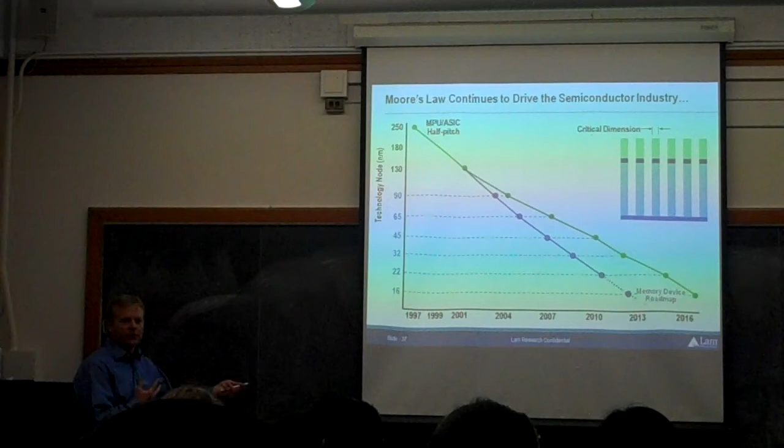So when they work on it, how do they test different options? Well, they have to have all the equipment we just showed you. That means Lam has to be way ahead of this roadmap. So the stuff that's in the fab today, I had to have ready for customers 4 or 5 years ago, and my R&D on that started even further back. So it's interesting - if you're looking at semiconductors, you think, oh, Intel's doing such cool stuff with these transistors, they're way ahead of us. But the stuff my group's working on is down here, it's single-digit nanometer stuff.

We're working on 7 nanometer, 8 nanometer stuff. This is really why I use nanotechnology in the title. It really is - we're down to the part where we're kind of manipulating atoms to get this stuff to work. That's why the equipment side, it's why I've stuck around so long, is it's really energizing because it's constantly changing, literally bleeding edge technology, because the R&D we're doing is way out here, and it'll show up at Intel 4 years from now.

So what drives all this new technology? There's NAND flash, the USB drive, the DRAM that goes in the phone, and then logic chips, and then some other stuff hanging in the future. There's a whole list in every one of these areas where new technologies are needed. I'm just going to give you one example, then we'll have time for questions.

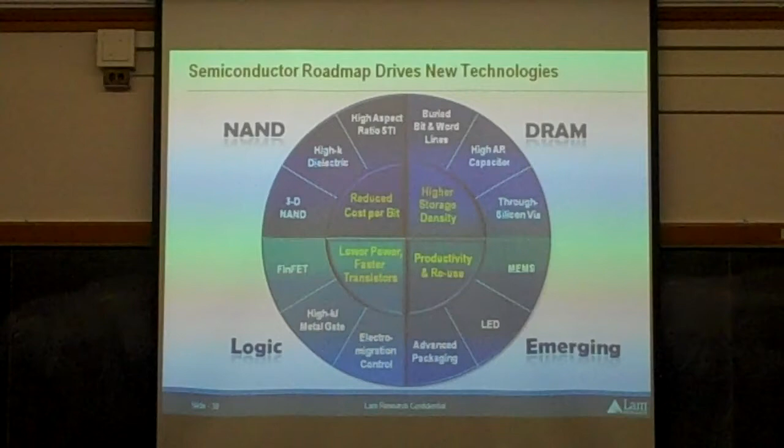Okay, I got a few slides up now, kind of Lam specific, our college programs. Lam's been in business 30 years. We talked about we're worldwide. We get various awards every once in a while - the most recent one was we're a top 125 training guide, that's nationwide.

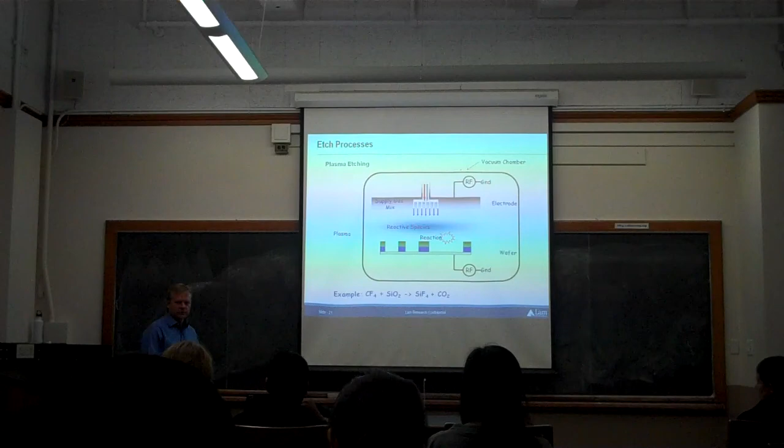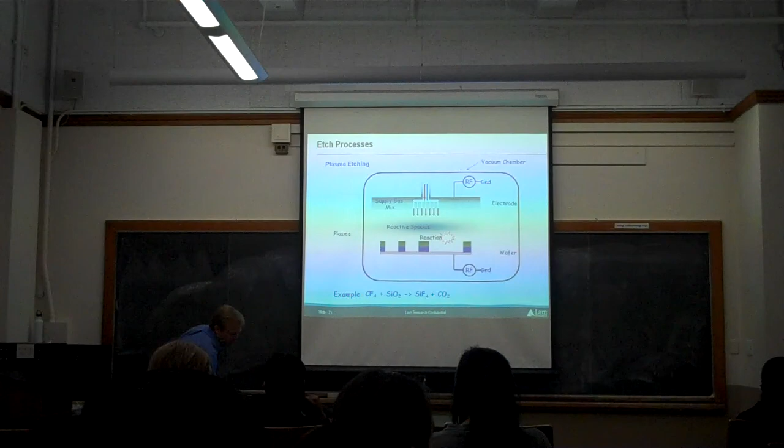On the PVD stuff—how consistent is the film? It's as consistent as the plasma you can make it.

There's a ton of tuning involved. In fact, to be honest, it's one of the most complicated systems we have. Plasmas, charged particles, are repelled by magnetic fields, so we actually embed magnets in the walls of the chamber to keep everything focused—otherwise the plasma will just kind of go everywhere. So we'll have it where it's like a magnetic bottle essentially that reflects the charged particles back, and you do that to make it uniform. But again, it's one of the tough problems we've got.

When you were talking about how you're using much more of the periodic table in processes now, if you're working on such small scales, how does using these large—well, fortunately,

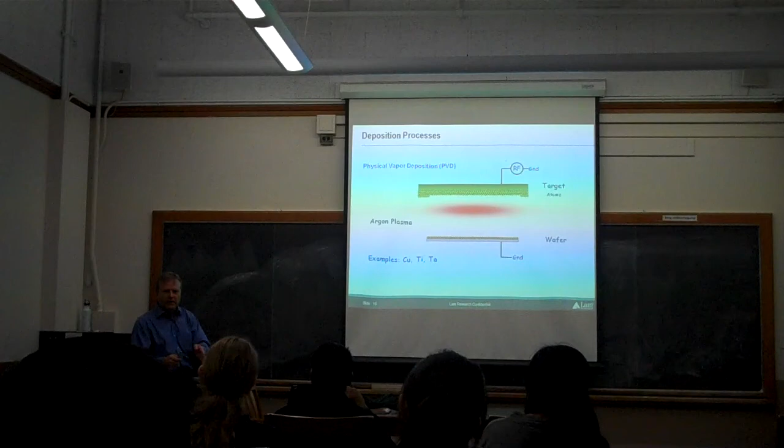most of the stuff we're looking at is still above atomic. I mean, even the big atoms are small enough. But you're right, a lot of the materials in that category are going to be deposited. So we're going to make a monolayer of one of these, like the hafnium stuff we were talking about, the hafnium oxide. You're not going to use them for etching or depositing in a very small feature—you're going to put it down and remove it step by step.

So this is also kind of about scale, but do you think we're going to see a minimum technology node distance in our lifetime? Yeah, I mean,